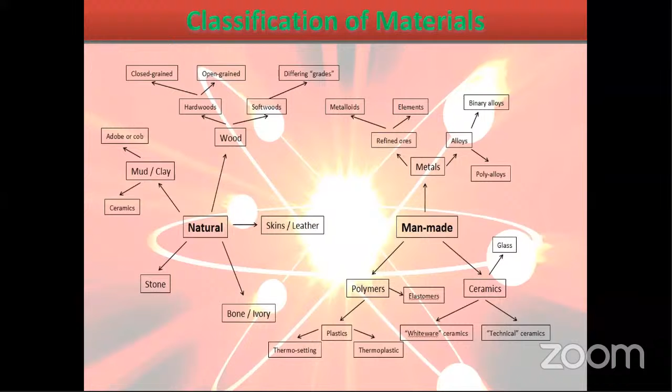Again, polymers are not directly available in nature. We fabricate those polymers like plastics, thermosets, and elastomers, and ceramics, and different types of ceramic materials. So the first classification starts with natural and man-made materials.

Again, engineering materials: in the engineering materials, these are all man-made materials. For example, metals, in which we have ferrous, non-ferrous, and amorphous. Again, there is a sub-classification. The topic is not about engineering materials, so I'm not going deep into it.

Coming to plastics, there are thermoplastics, thermosets, and elastomers — three classifications in the plastics. Thermoplastics have different properties, thermosets have different properties, and elastomers have different properties and structures.

Coming to ceramics, these are high temperature resistant materials. In ceramics, we have different types of ceramic materials. As you see on the screen, there are different types of oxides, nitrides, carbides. There are sub-classifications of ceramics.

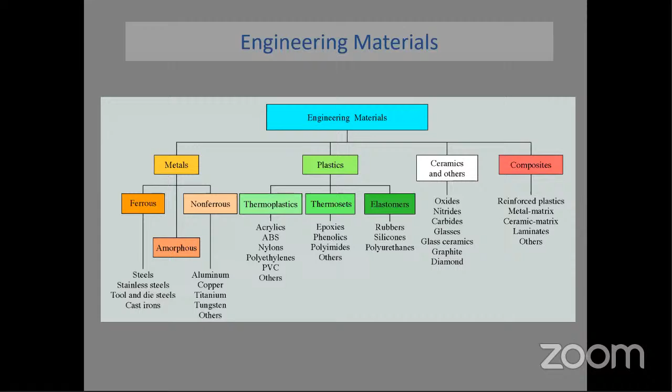Coming to composites: today's topic is about nanocomposites. First we'll see what is a composite and what is a nanocomposite. In composites, we have reinforced plastic composites, metal matrix composites, ceramic matrix composites, and different types of laminates. In the classification, we can name microfiber composites, microfiller composites, nanocomposites, and nanofiller composites. First we'll see straight away the definition of a composite.

Maybe already, from the last two or three days since this program started, many speakers already talked about the composite definition. You might already be familiar with this, and many people are working on this. A composite is a combination of two or more materials. In simple terms, reinforcement plus matrix gives you a composite. In the picture, you can see examples like mud straw bricks, concrete, and glass fiber composites.

The definition for composites and an alloy are the same. If you see, the combination of two or more metals — in an alloy also it's a combination of two or more metals. In both cases the definitions are the same. But in an alloy, when you combine these two materials, the base material loses its original structure and original properties, and the newly formed material has new properties, particularly in an alloy when you combine two or more metals.

But when you come to the composite, even when you combine two or more materials, the basic materials being combined don't lose their original properties. They remain the same, but act as a single material while their own properties remain unchanged. So there is a basic difference between a composite and an alloy.

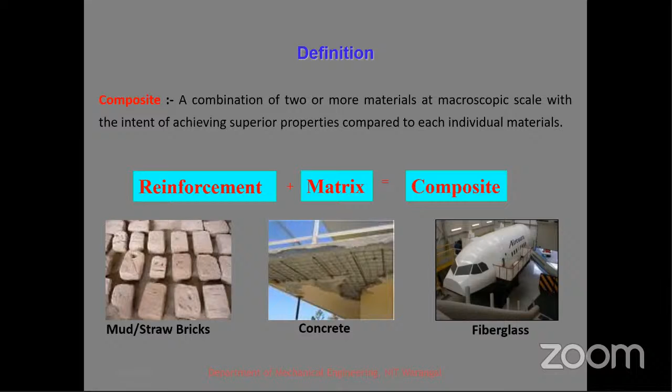Coming to the classification, we have reinforcement and matrix. So what is the use of reinforcement and what is the use of matrix? Basically, matrix is a material which is used to surround the reinforcements.

This matrix material may be metal, polymer or ceramic. It is a continuous phase used to surround the reinforcement. So when it is surrounding the reinforcement, it is not the load carrying material. Matrix is not a load carrying material. As it surrounds the reinforcement, it always transfers the load to the reinforcements.

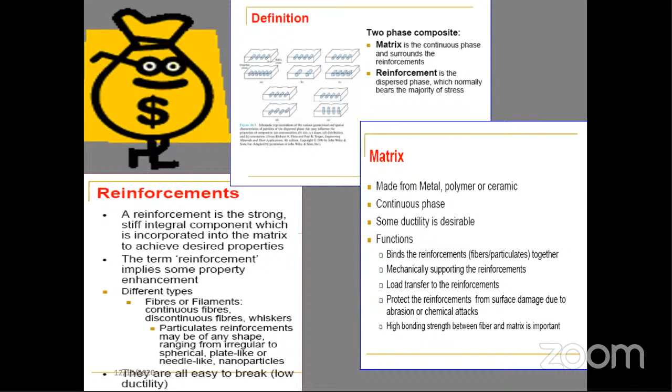The reinforcement is a material which carries the load, whether continuous fibers or discontinuous fibers. When it is particulate, the concept is the same - load carrying material will be the particles, but the majority of load transformation as well as carrying will be taken by the matrix also in that condition, particularly when it is particulates. So the matrix material is a load transferring material, reinforcement is a load carrying material.

Some classification related to matrix: we have metal matrix composites, polymer matrix composites, and ceramic matrix composites. When you are using these three as a matrix material, then we can call that matrix classification - metal matrix, polymer matrix, and ceramic matrix.

Again, in polymers we have thermoplastics and thermosets. In metals we have different types of metals. These metals we will use as continuous fiber sometimes, sometimes use as rod type materials. So when you use metals as rod materials, we call them reinforcements. If you are using metals as a continuous phase, we call that a matrix material.

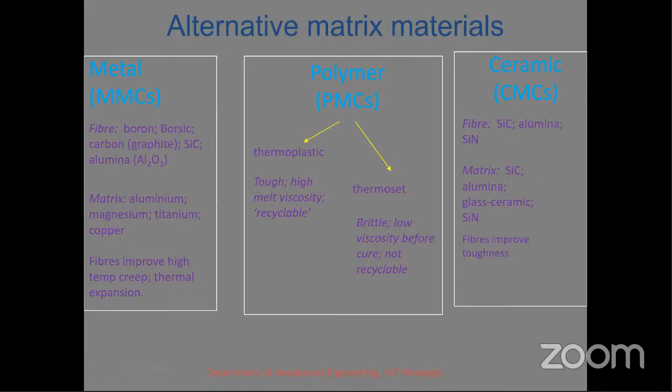So those are general composites. What is a hybrid composite? I'm quickly changing over from normal composites to hybrid composites because the concept is about nano composites. We discuss more about nano composites, so I'm not discussing more about continuous normal composites, continuous fiber composites, all those. Directly I'm going to the hybrid composites.

Normal composites, when you are combining one reinforcement and one matrix, we call normal composites. When you are combining two types of reinforcements with one matrix material, that is called hybridization.

Why do we go for hybridization? Let us take a glass fiber composite and a carbon fiber composite. If I prepare separate individual glass fiber composites and individual carbon fiber composites, and if my application's required strength is in between the carbon fiber and glass fiber strengths - glass fiber strength individually comes to 2000, carbon fiber strength is almost 5000 - so if my application needs something in between, not 2000, not 5000, then if I select carbon fibers, the cost of carbon fibers is higher.

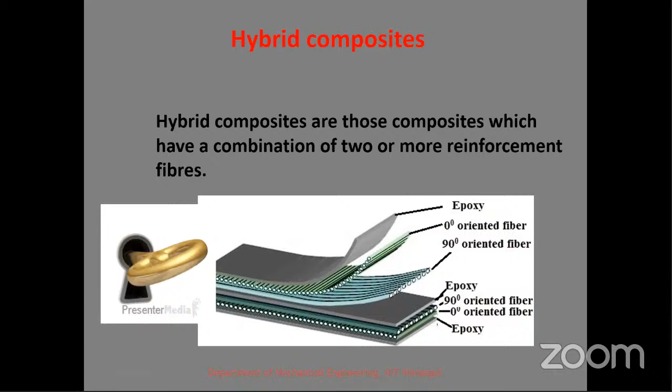So to substitute or increase that property into the composite, I hybridize the material. That is another concept: to substitute some other properties, like once a material has some defects or disadvantages, those disadvantages will be rectified with some other material. So in that case also we go for hybridization. Hybridization means combination, we can go for it. So that is called hybridized composites.

Recently we have slogans like reduce plastic and remove plastic, remove the conventional materials which create pollution. So when we are removing those things, again we need to replace those materials with natural materials. Because if you see the cycle of materials, we started with natural materials. After that, natural materials were replaced with metals. We have metals, and after metals, in the 1940s and 1950s, we have plastic.

So the entire thing is now fully covered with plastics. All the metal materials, 90% will be covered or replaced with plastic materials and composites. Now we have a problem with these composites, with this plastic. Now we are thinking about replacing the plastic with natural materials. Again the cycle, you can see, starts from nature, and again we are going back to nature.

Nowadays people are trying to develop new materials related to nature, biocompatible materials. In that case, the only disadvantage with natural materials is we are habituated to metals, which have high strength. We are habituated to lightweight materials, which is plastics. And now again we are going to natural materials, which have more defects.

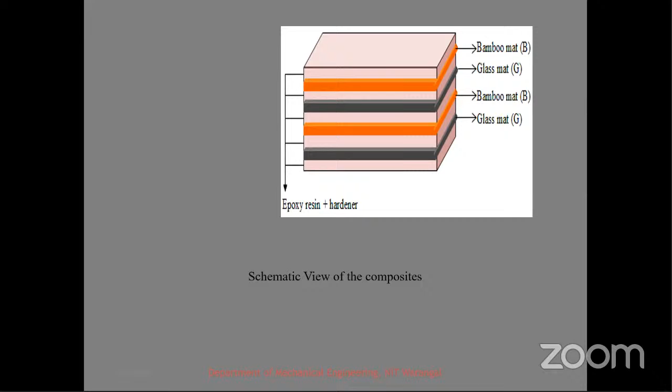So in that condition also, we can go for hybridization. Instead of going for conventional glass fibers, we can try with bamboo material or jute material, natural materials, and we can see the strengths, how much amount of strength is coming to those materials, so that we can compare and replace those glass fibers in present applications. So that is the idea behind this.

So the other concept, after hybridization, nearer to nanotechnology and nanomaterials, is filler composites. Adding fillers to the composites, whether directly adding particles to the matrix, or metals or ceramics as a separate filler composite or hybrid filler composite. So two ways can be done.

These metallic powders can be used directly as fillers into composites, into polymers or metals, or these can be used as fillers in hybrid composites, like continuous fiber composites, to replace the gaps between the continuous fiber composites and to reduce the matrix material. So we can add these type of filler materials.

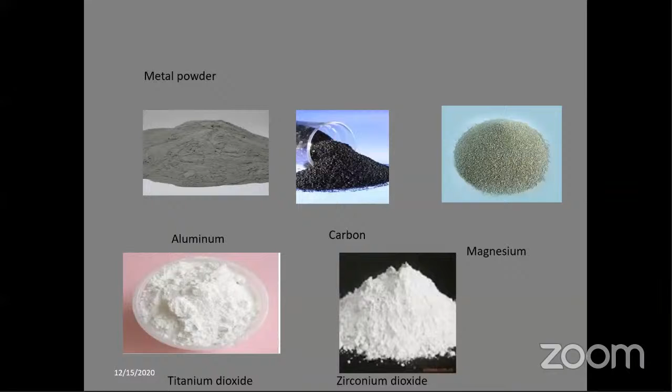In this filler concept, we have two types: one is micro material, another one is nano material. If we use micro as fillers, those composites are micro composites. If we use the same material in a nano level, then we call them nano composites. So now we are going to nano composites. We'll start our topic with this.

If you see 10 to the power of minus 9, that is very small, which we can't see with our eyes. The least material which we can see with our eyes is almost 100 microns, that is our hair, the hair diameter only we can see. That is the least size which we can see with our eyes, 100 microns. Nano means 10 to the power of minus 9, which is much smaller, which we can't see.

Then what is a nano composite? People who don't know the concept of composites and some other terms automatically feel that nano composites means invisible composites. It is nothing like invisible composites. The definition says that in a continuous reinforcement in a matrix, if we use the reinforcement in a nano phase, then we call that a nano composite. So nano composites are visible. The particles which we are using at a nano level, we call that a nano composite.

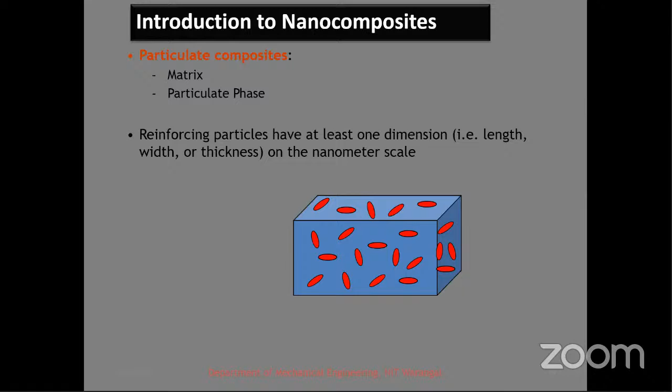Whether it may be fillers or continuous fibers, the fibers may be used with a certain diameter level. We'll see what the different nano levels are in nanotechnology in the next slides. So particularly in a reinforcement, if one phase is in a nano phase, then we call that a nano composite. Now we'll see what nano is.

Simply in mathematical terms, if I say 10 to the power of minus 9, mathematically we can easily understand that. But to see how small it really is, if we start comparing nano to other sizes, we can easily understand how small it is. A small comparison to understand it clearly, a rough comparison, not a planned comparison.

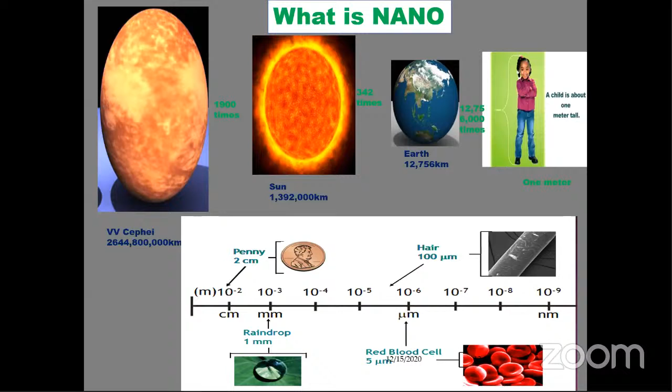And suddenly, like a 1 meter child, discussing the other things becomes difficult. So for a 1 meter child height, again you can see it is 12,756,000 times smaller. Now we'll see in this picture, we are entering into a microzone.

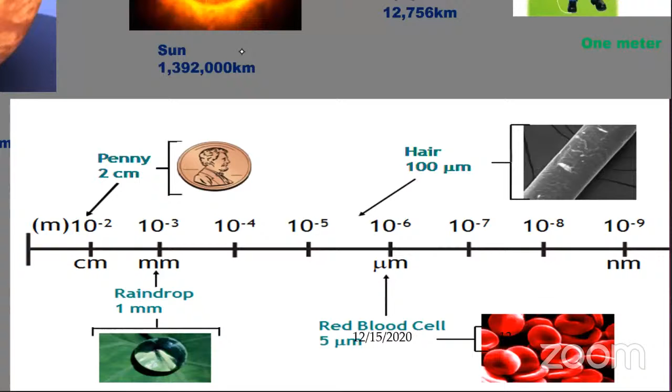In the microzone, you can see a penny coin is 2 centimeters. The raindrop is 1 mm. As I said, the least particle which we can see with our eyes is the hair diameter, not hair length, hair diameter, which is 100 microns. The next one, 5 microns, blood cells. Those blood cells also we can see, but an individual blood cell we can't see, it will be seen as a bulk. So the individual blood cell is 5 microns, which we can't see as an individual, we see it as a bulk material.

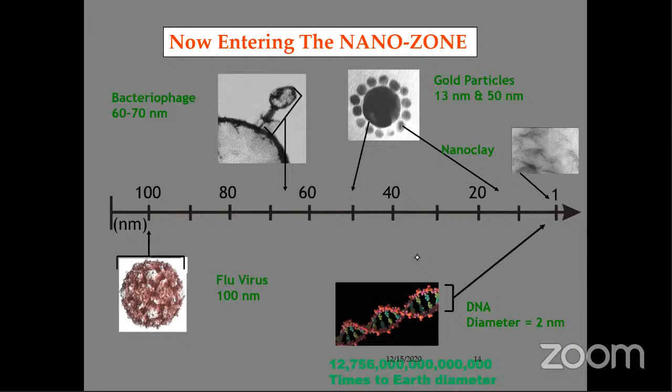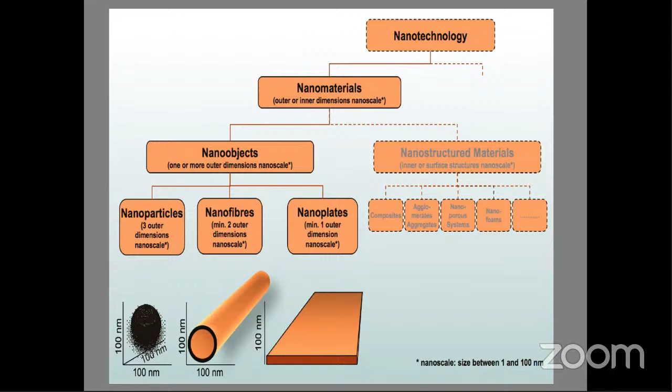This is about nanomaterials, particularly in nanocomposites. We'll have polymer based nanocomposites, which we can prepare. Non-polymer based nanocomposites also we can prepare. If it is non-polymer based, one option is metals, ceramics, ceramic nanocomposites.

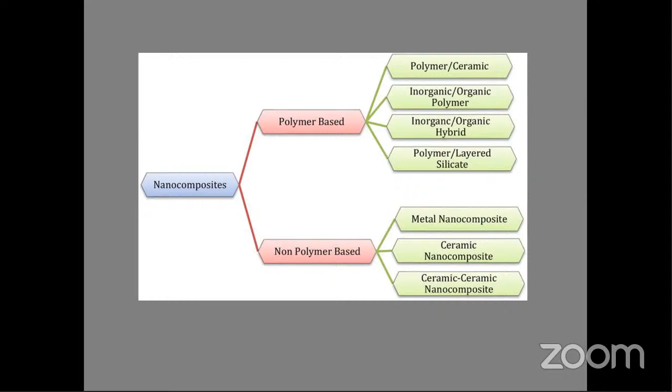So these are different types of materials like polymers—we can use polymers, inorganic hybrids, and polymer layered silicates. By using polymers we can prepare nanocomposites, and by using non-polymer based materials also we can prepare nanocomposites.

So the basic term, when we are preparing nanocomposites—earlier speakers already talked about the preparation of nanocomposites. I'll start with the preparation of nanomaterials: how we prepare nanomaterials, and after that, how we incorporate those into composites.

The first thing is we need to learn how to prepare a nanomaterial. Basically, when you start research, if your objective is to prepare nanomaterials, you'll start developing them. If your objective is instead to prepare nanocomposites, then you don't prepare nanomaterials—you straight away purchase those nanomaterials available in the market, work with them, and fabricate nanocomposites.

Instead of purchasing, if you prepare your own nanomaterials for research, that will be more advantageous, because purchasing a nanomaterial costs higher. If you develop your own nanomaterials, you can vary the designs and develop different types and shapes of nanomaterials.

We'll see some fabrication techniques related to nanomaterials. In the preparation of nanomaterials, we have two methods: one is the bottom up method, another is the top down approach.

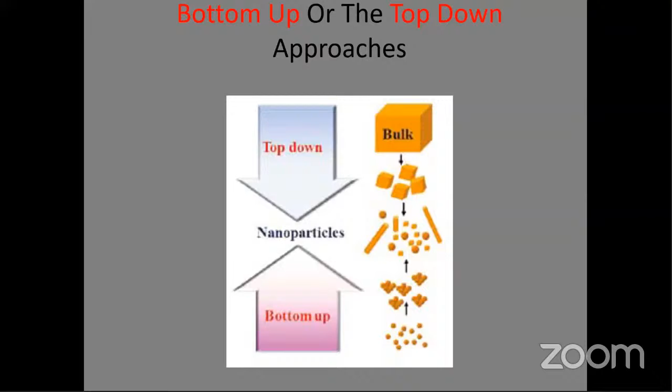We'll see some examples of fabrication of materials. This is a top down approach, like mechanical grinding. Later we'll see in depth how this mechanical grinding works and everything.

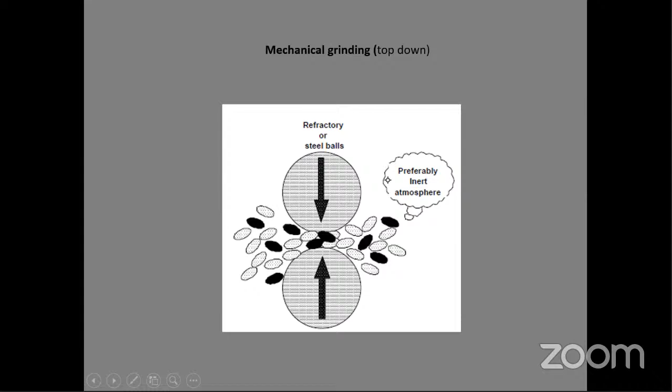Mechanical grinding means two balls will come and contact. When the material comes between these two balls, it automatically breaks into small pieces. So that is about mechanical grinding, which is top down.

The preparation of alumina. First, before going to the preparation, let me introduce what alumina is. Alumina is a ceramic material, not a metal. This alumina is available in gamma phase and alpha phase, two phases.

When you purchase these nanomaterials from outside, the cost is very high. Instead, we can easily fabricate them when we have aluminum nitrate, glycine or citric acid (any one material), some glass beakers, a magnetic hot plate, and a furnace. These are the equipment required to fabricate nano alumina.

The chemicals required are aluminum nitrate, and we can go for glycine or citric acid as a combination. These are available materials; 1 kg of aluminum nitrate costs almost 600 or 700, and citric acid also approximately 500.

After mixing the solution, we keep it on a magnetic hot plate. A magnet is placed inside so that a stirrer placed in the beaker rotates. When you switch it on, the magnet rotates and the stirrer inside starts self-rotating.

We keep this solution on the magnetic hot plate, start the machine, and maintain it at 50 degrees. After 2-3 hours, the water molecules evaporate slowly, since the aluminum nitrate equation shows it has 9H2O, and the other compound also has more water, along with the added water.

Once all the water has evaporated, the remaining material forms as an ash kind of content in the beaker. We take that ash material and put it in the furnace for 8 hours.

The temperature can be varied from 800 to 1000. As I said, alumina is available in two forms: gamma alumina and alpha alumina. If you burn at 500, 600, or 700, the alumina formed will be gamma alumina. From 800 to 1000, you get alpha alumina, which is the pure form of alumina, a pure ceramic.

We need to check by varying parameters like 800 to 1000 in the furnace to find at the least temperature what best alumina we can get when developing it. After that, we get a pure alpha or gamma alumina.

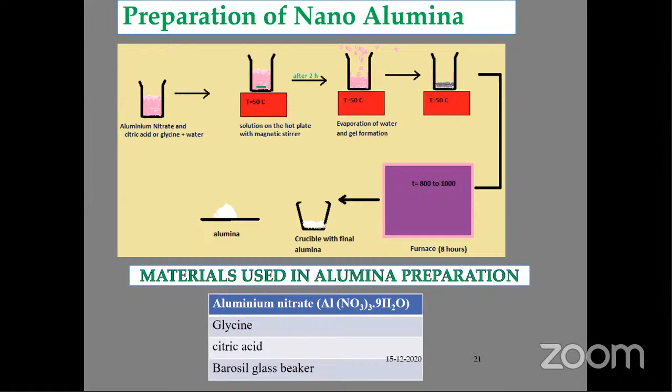So another technique, this is a top-down approach: ball milling. This is a mechanical process, whereas the earlier one was a chemical process. So in preparation, we have two processes: one chemical, and one pure mechanical.

In the mechanical process, in simple terms, if you want to convert something into particles, the best way, like in our houses, is a mixie. We put everything in the mixie and run it for 5 minutes, and the entire solid structure converts into small pieces. The same process is adopted in this ball milling process.

In the mixie we have blades; here in ball milling we have balls, of different sizes. These balls are placed inside the planetary ball mill in beakers, along with whatever material we need to convert into nano size.

We run it planetarily for hours, like 5, 10, or 15 hours, depending on the material's hardness. After running for these hours, due to continuous rupture between the balls and the material, the material converts into small sizes. The bigger micron material converts into nanomaterial. That's what happens in the ball milling process.

Sometimes this process is done without any coolants or liquids, so we can do dry milling instead of wet milling. But sometimes the materials stick to the containers or beakers, and in that condition we go for wet milling.

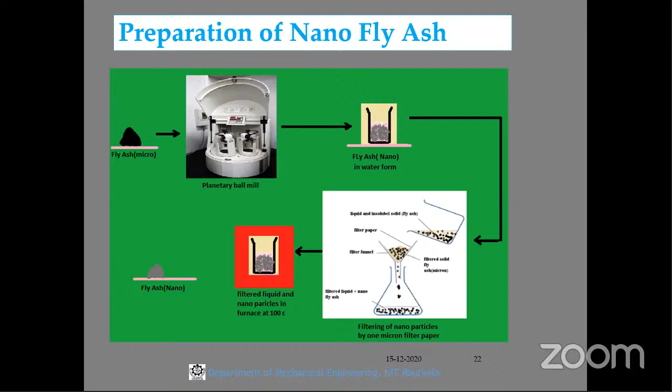So these are the two processes by which you can develop your own nanomaterials based on applications and the materials you select. Next, why do we need to go for these nanomaterials? What are the advantages? Why is nanotechnology popular?

Nowadays we are going towards nanotechnology and trying with nanomaterials and nanocomposites, because we already have continuous fiber composites and micro composites, and now we are trying with nanocomposites. What are the advantages of these nanomaterials? We'll see a few advantages now.

I already explained this slide earlier, the definition of nanocomposites, since we slightly moved to preparation of nanomaterials. Coming back to nanomaterials, I've given this definition again: one dimension will be at the nano level. Let's see what the advantages are. Take this picture — a small cube is taken, and the surface of that cube will be calculated.

The side of the cube is 5 centimeters, so the height is also 5. The area of that cube face is the side of the cube, 5 into 5, that is 25. It has 6 faces, so 5 into 5 into 6, that is 150. The surface area of that particular cube is 150.

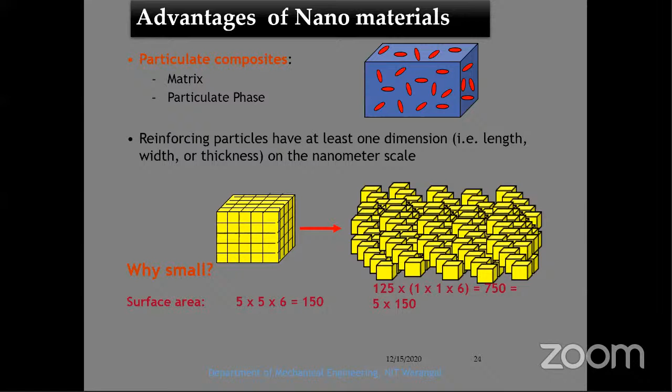In composites, if the interface area is good, the strength will be increased, because the interface area is very important. Basically, when you are developing any type of composite material, we are disturbing the structure of the polymer. For example, if you are developing polymer composites, the atomic structure of the polymers is disturbed by these particles.

When you disturb it, there won't be chemical bonding between the materials, there will be physical bonding. When physical bonding occurs between the matrix material and the micron particle material, the interface is very important. When proper interface takes place with higher interface strength, the load transformation will be better. So the interface is important in composites.

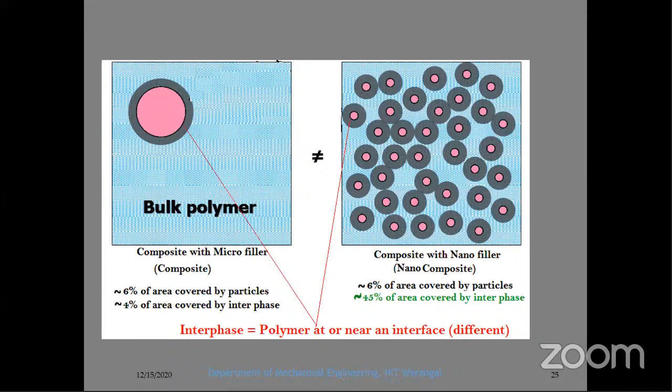So that is another advantage particularly with nanomaterials. These are some of the advantages of nanomaterials. So next is...

There is how to prepare a biocarbon. As I said, these are conventional nanomaterials, like for example alumina preparation, again we prepare it from chemicals.

For example, fly ash is industrial waste. That is one advantage, we are using industrial waste.

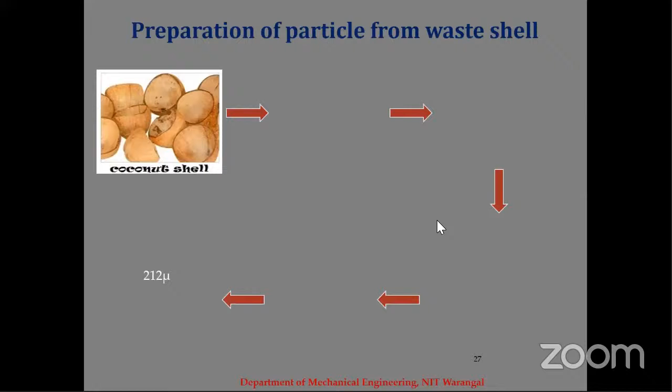Another thing is how to prepare a nano biocarbon. The main importance is, particularly when preparing a biocarbon, how you prepare it, what are the uses, and why we go for biocarbon. Developing biocarbon is important because when preparing these materials, the applications of biocarbon increase, so they can be replaced with conventional carbon materials.

In nature, as I said, there are different materials available, and those materials we can use to show different applications. For example, if I take water filters, if you see the different types of filters, the first filter we have is the carbon filter. That carbon filter's particles are prepared using coconut shells. If you search online, you can see coconut shell materials are used to prepare that charcoal. It's not from coal, it's charcoal, prepared from coconut shell chips.

So particularly when using these natural materials - if you don't use them, coconut shells directly decompose in the atmosphere and release carbon again. Basically, throughout their lifetime, natural plants absorb carbon, then after decomposing, they release the carbon again. So if I use this carbon for different applications, automatically pollution will be reduced, the usage of waste materials increases, and the cost of the final components also reduces.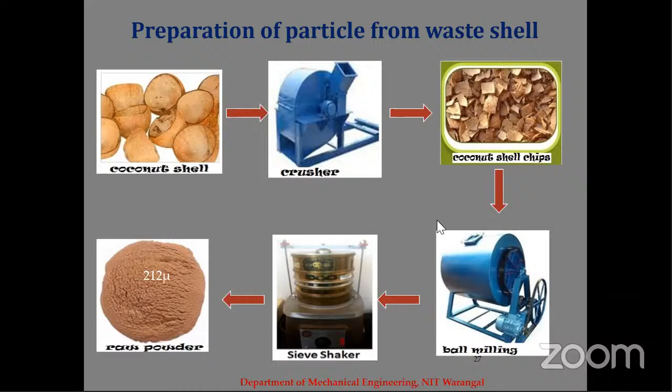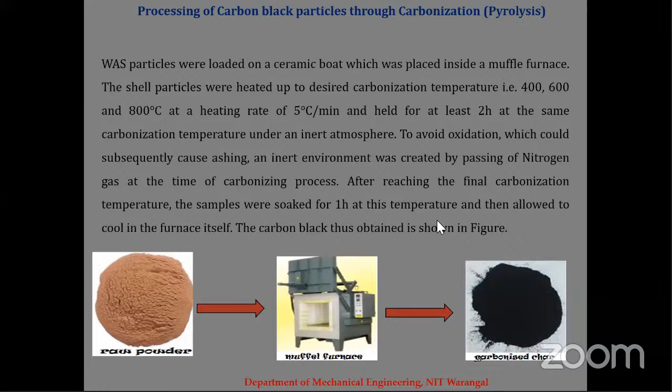So in the example, you can see coconut shells crushed into chips, put in the ball mill, and after that we'll have a raw powder. That raw powder we put in the furnace in an inert atmosphere, and then we have a carbon char, which consists of fixed carbon and allied carbon. I'm not going deep into the pyrolysis process and all that. The carbon particles, when put in an inert atmosphere, automatically become carbon particles - charcoal particles. It depends upon the size, whether you're going for micron particles, bigger sized chips, or nanocarbon. Depending on the sizes, we'll have a carbon char.

That carbon char has two different activation methods: single step and two step. A single step means directly milling it, converting it, and then by physical or chemical activation, burning at different temperatures from 400 to 1000 degrees, and then washing it. The other one, two step, is preparing the carbon in a single step, activating that material, and then burning the material again.

Why we go for activation later is a different concept, because some materials will break bonds at lower temperatures, some bonds won't break at lower temperatures. For example, the carbon formed with different bonds - some bonds will break at 400 degrees centigrade, some bonds won't break at 400 degrees centigrade, so we need a higher temperature. Instead of going to higher temperatures, we go for activation of the materials. That's a different concept in pyrolysis.

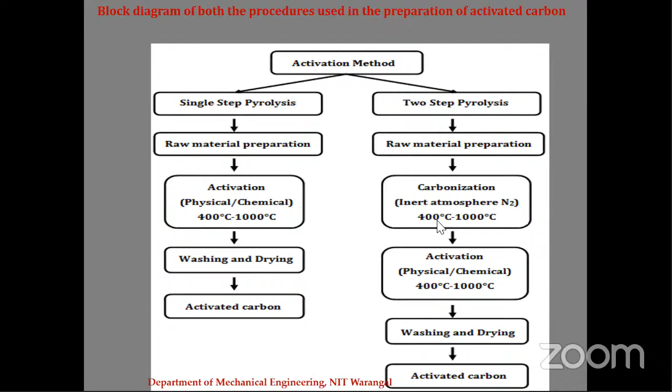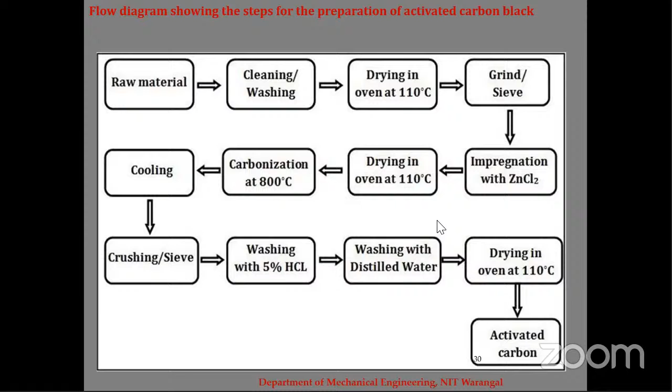So these are the steps involved in the fabrication: raw material cleaning, drying and grinding, activating the materials, drying it again, carbonizing at 800 degrees centigrade, and washing with different materials to remove the activated materials. This is the activation carbon process.

So once you prepare any type of nanomaterial, you need to prove that the fabricated material is in the nano level. So for that, we'll go for SEM analysis or TEM analysis or XRD, some other techniques we'll use to prove that the fabricated materials are in the nanozone.

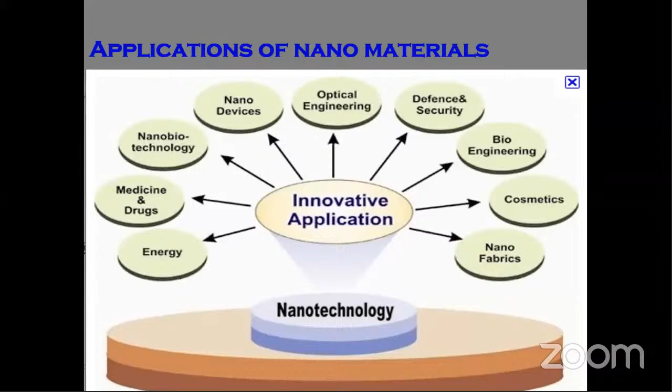Some applications, many speakers already talked about it, like energy applications, medicine, drugs, nanobiotechnology, nano devices, and different nano fabrics, cosmetics - all these are applications of nanomaterials.

So coming to the fabrication of nanocomposites, maybe a few of the speakers may talk about this fabrication. Basically, if I talk about polymers, the basic technique which we have for composites is the hand layup technique. So we can prepare the composites by using a hand layup technique.

In the hand layup technique, we require a mold. We can prepare a mold on our own, and we need to select some polymers which are suitable for the applications. If you are going for nanomaterials, as we are discussing, we'll talk about only nano things. If you select nano fillers, we can select one or two fillers, and we go for certain calculations related to the molds, and some equations related to it, and we design those things.

We'll mix it and pour it into the mold. So this hand layup technique is a traditional, old technique - the first technique, as people know about castings. So the casting technique is the first basic technique.

After casting, due to different disadvantages and problems in castings, further classification of casting came into existence, like low pressure casting, high pressure casting, centrifugal casting, die casting. So many casting techniques came into existence, like investment casting - these came into existence after identifying defects in the castings.

So this is a traditional technique, the hand layup technique - the first basic technique which we have for composites. In this composite technique also, there are different disadvantages. So to remove and reduce those disadvantages, people modified this technique into spray up technique, filament winding, pultrusion technique. There are different techniques for fabricating composites.

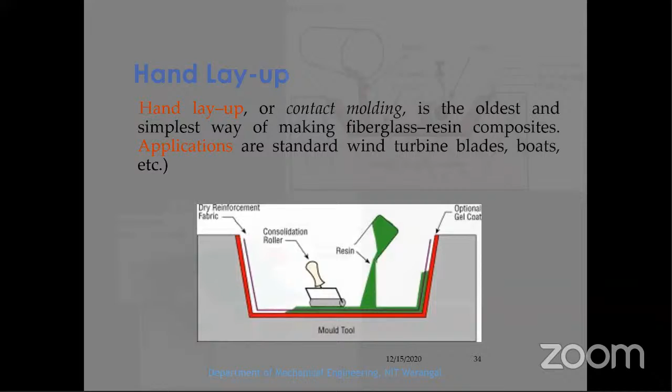So this is the technique. A roller is required and a mold can be prepared. Once we do the calculations for how much volume fraction we need for the reinforcement and matrix, directly we'll mix it and then pour it on that.

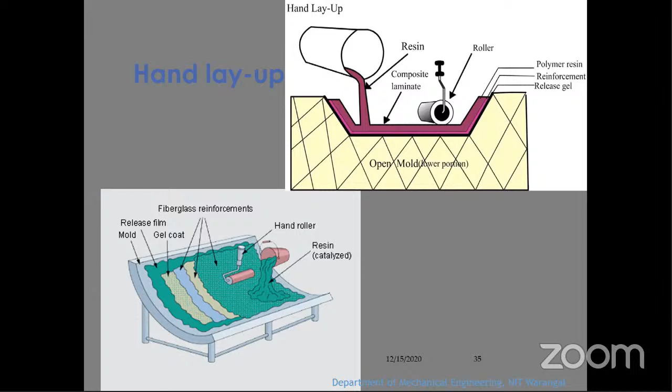A rolling process is applied to make it a uniform structure. Once a uniform structure is formed, then we go for curing it. Once it is cured, then we'll go for a finishing process of those composites, and finally we'll have a composite. So this is the hand layup technique.

To prepare a nano metal matrix composite, we go for stir casting. Stir casting is a basic technique, and again in that also there are modifications - stir casting with mechanical stirring process, and ultrasonication. Ultrasonication also we can do.

So the mixing of materials is important in the stir casting process. When we stir the metals, we need to ensure that nanomaterials won't settle down at one portion or form any agglomerations. Basically, the problems faced when preparing the composites are that particles settle at one portion or form agglomerations in the material, causing the fabricated composite to have certain defects.

To avoid that, we need certain modifications to the process so that we can avoid the settling of nanoparticles or formation of agglomeration of nanoparticles. We need to see that the entire particles must be uniformly distributed in the entire structure. Whatever material we are finally fabricating, the particles must be uniformly distributed in the entire composite. Only then will the composite be formed properly so that the strength increases. So that is about the stir casting process.

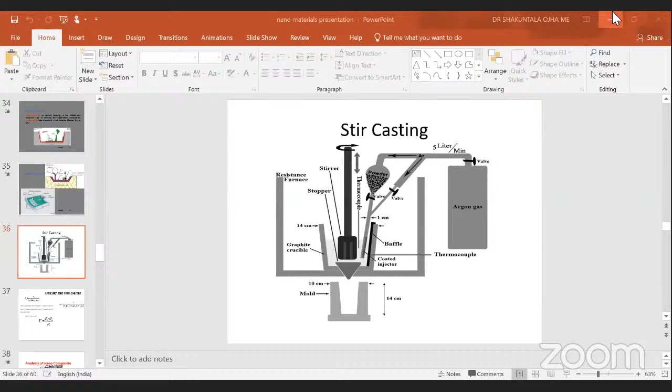So regarding those particular calculations, if nobody requires the calculations, then I'll directly go to density and void content. For the next 20-30 minutes, I'll continue the lecture and then later we'll discuss any questions.

So in composite fabrication, whether nano composites or normal composites, we need to calculate the density. Density is very important, and the next one is void content. So, calculation of density.

Coming to density, we have two terms: bulk density and true density. True density is the real density. Bulk density - when calculating for a particular material in powder form, if you want to calculate the density, you'll get bulk density using the formula mass by volume. That is not a pure density. To know the pure density, we need to use the Archimedes principle.

So using a pycnometer - directly take the material which we need to test the density. These are some formulas, like W naught by W naught plus WA minus WB. The terms written at the bottom are: weight of the sample, bottle plus kerosene, weight of the sample plus bottle plus kerosene plus sample. By using this formula, we'll get the specific gravity of the particular material.

And to know the density, we need to multiply with the kerosene - if you are using the liquid as kerosene, then we go with the density of kerosene; if using water, we can go with water's density. Whatever liquid we are using in that pycnometer. So to know the density of a material, we need to dip that material into the beaker to see how much amount of liquid is expelled.

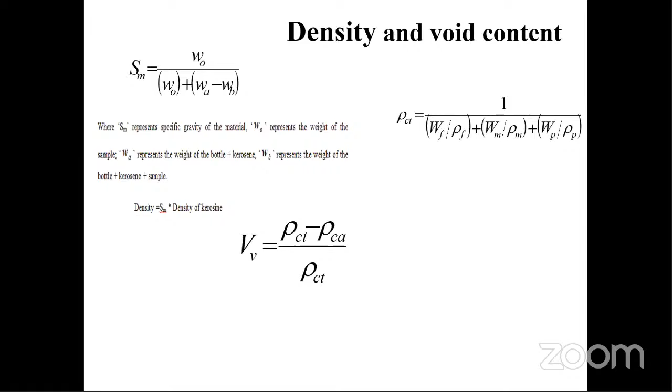Coming to some analysis of nanocomposites: this is a tensile test using a dog bone shaped specimen. Once samples are prepared—whether continuous fiber composites, particulate composites, or nanocomposites—we test them using the tensile test method with a UTM.

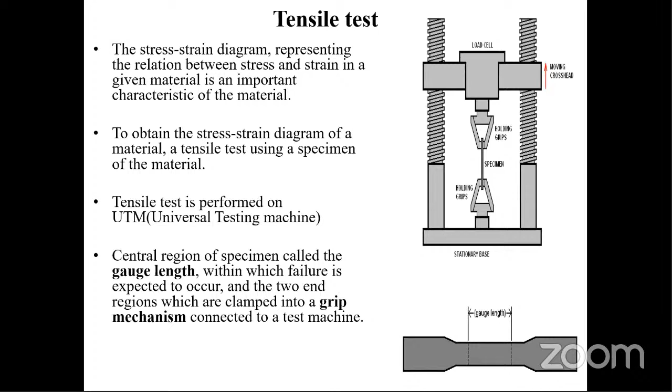A dog bone shape is prepared for testing. If it's a continuous material, we don't use a dog bone shape, but for particles or nanocomposites we do. The maximum load is applied where there is less cross section, so the load acts on the gauge length zone, which is why this region is tapered—bigger diameter on the ends, smaller in the middle. The entire load applies in this zone, and wherever there are surface or internal defects, the load affects that area most. If there are no defects, failure occurs at the center.

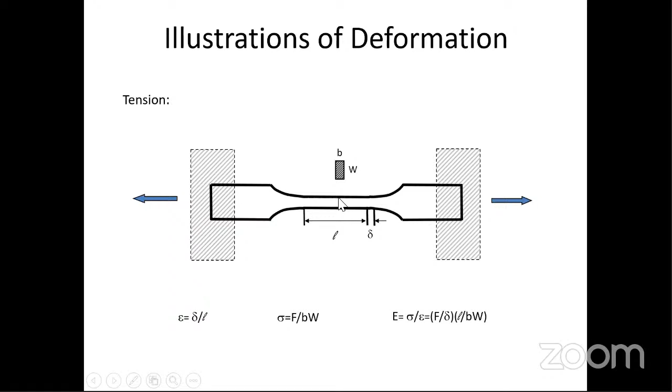Next is the compression test, applied on the same UTM but with load in the opposite direction. For fibers, buckling takes place; for particles, breakage occurs depending on whether the material is ductile or brittle. If ductile, elongation occurs and the length converts into width. If brittle, a sudden fracture takes place and the material breaks. This happens during compression.

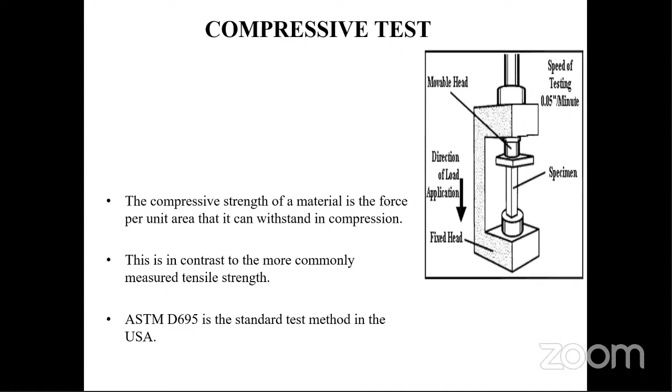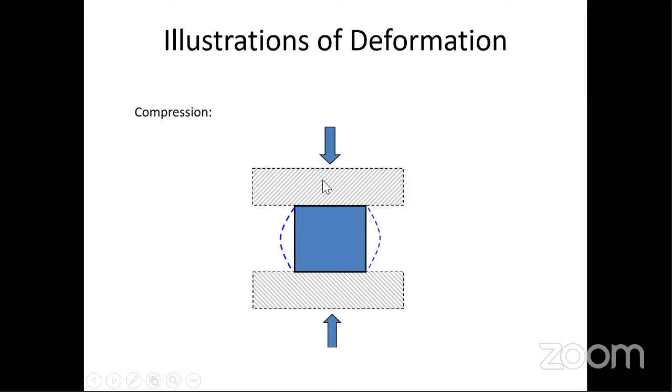You can see this directly in the picture: when compressing, the length decreases while the width increases.

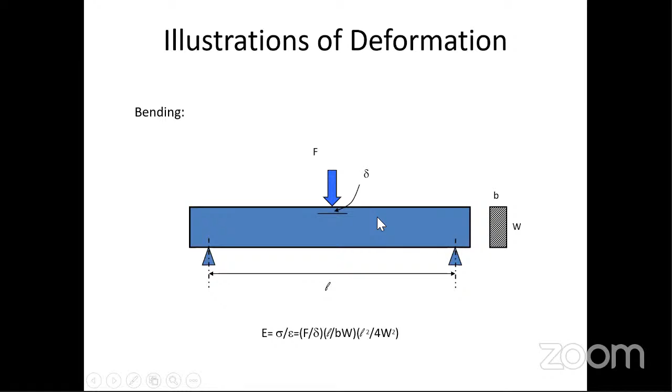Another test is the bending test. Whatever the sample—nanocomposite or normal—we go for a 3-point bending test, with two supports and load applied at the center, causing bending. When the supports are placed farther apart, shearing is less and can be assumed negligible, so maximum bending takes place. There will be a bending load, and the shearing component of the load will be minimal.

So the same thing, interlaminar shear stress, the same type of 3-point bending test, but the length is much less, half of the earlier one. In that condition, shearing of the layers will take place and bending of the fibers will be negligible. So when bending is negligible, we'll have a shearing load, that's why the interlaminar shear test is done. The shearing of the fibers can be seen here along with the particles.

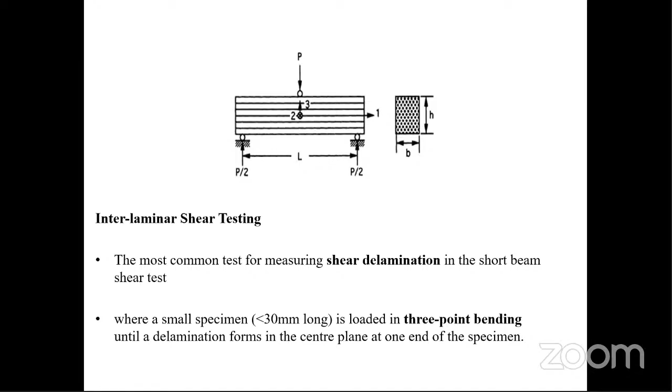So these are some characterizations related to nanocomposites or general composites. Once you develop any type of composite and test all the mechanical properties, sometimes we'll have a disadvantage - we don't get the exact required results. Then automatically we go for a change of materials. Instead of changing materials, if you test other properties, like tribological properties instead of mechanical properties, they may enhance. So when we have better tribological properties, instead of showing mechanical applications, you can show that composites are materials in terms of tribological point of view.

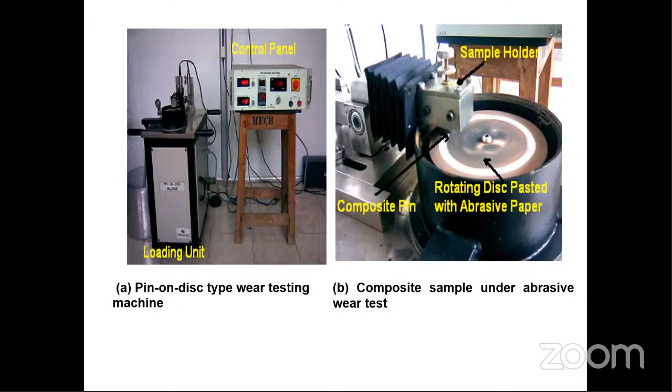So this is a pin on disk apparatus, used for an abrasion test. In the picture you can see it - the pin will be whatever composite or nanocomposite we develop, placed here, and the disk on top will be rotated. So the composite or nanocomposite pin, how the wear resistance takes place due to addition of these nanoparticles, that will be tested and compared.

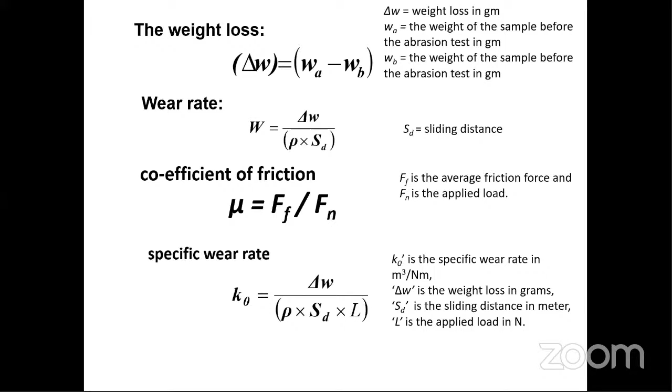Some values related to it - this will be conducted by the weight loss method. The initial weight of the composite and final weight of the composite will be taken, and then we calculate using the weight loss method, and a wear rate will be calculated. These are the terms and calculations when conducting a wear test, abrasive wear test. So when two materials are in contact, due to wear, how material loss occurs will be calculated. If mechanical properties are less, then we check for tribological properties.

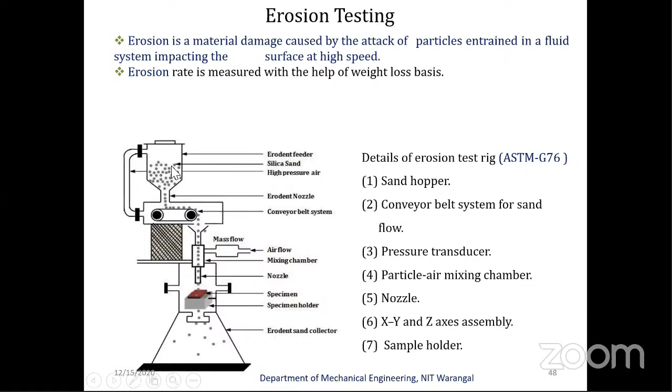Another test is the erosion test - this is a sand impact test, another characterization. When sand impacts on top of a material, here in the picture you can see it, on the composite, due to impact, material loss occurs on the top surface at different angles. We can vary these angles in this apparatus from 30 to 90 degrees, and see how the material behaves with different angles of impact. So when we fabricate a nanocomposite, we can see due to impact how the material behaves at different velocities as well as different angles.

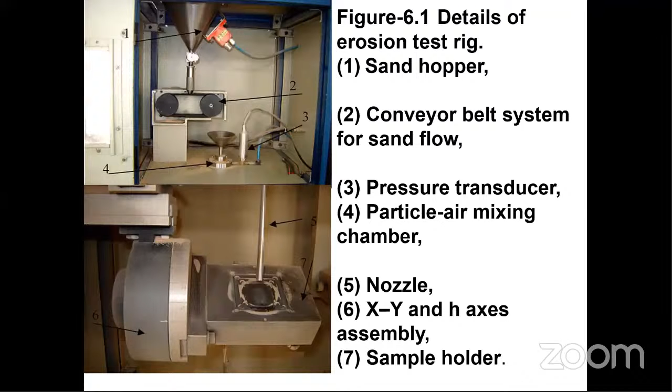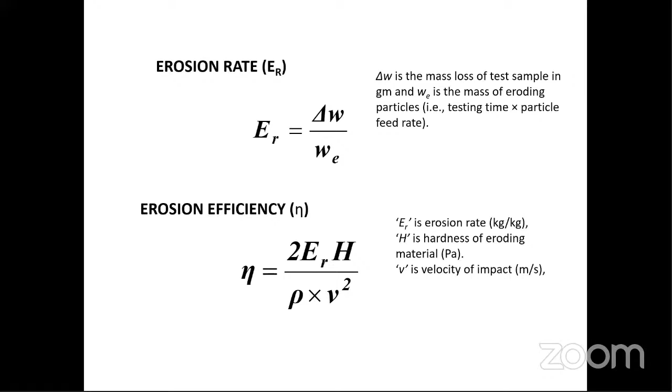This test is also calculated by the weight loss method. Initial weight and final weight of the materials will be calculated and tested. The formula is delta W by WE, that is the total mass of the erodent particles and the weight loss.

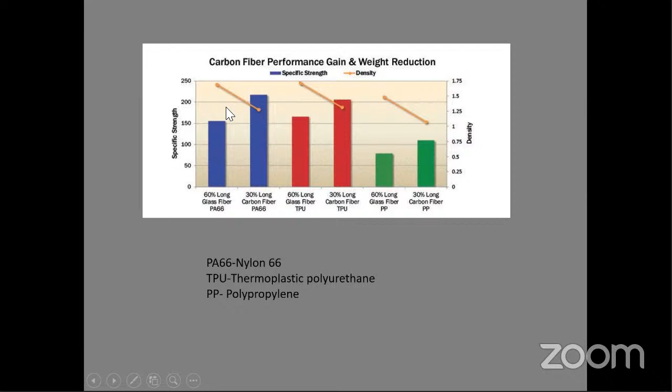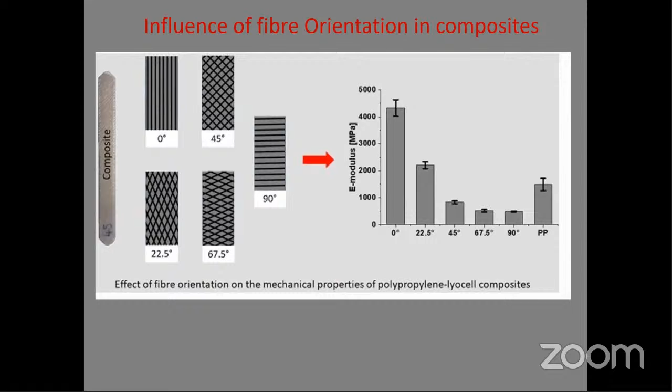Even for continuous fibers, the orientation of the fibers is important, depending on which direction we are applying the load. If you have fibers in that direction, the strength of the composite is higher. If you don't have fibers in that direction, the strength is less compared to the pure polymer.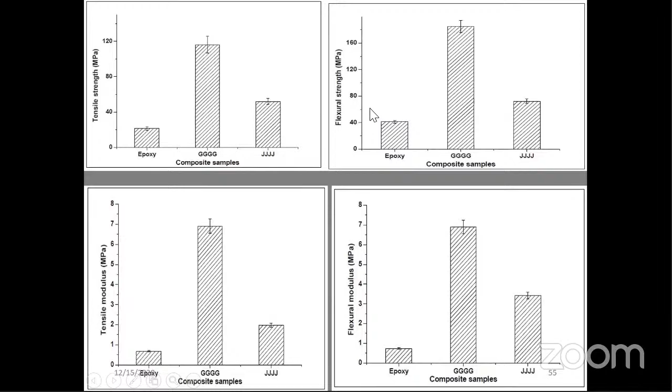This is compared across flexural strength, flexural modulus, and tensile modulus. All the results show the same trend.

So instead of going for plain composites, the next concept is hybrid composites - adding a hybrid composite. Instead of plain jute material, we combine glass and jute, but still none of these materials have the capacity to replace the continuous 4-layer glass fiber composites. In all the results, the glass fiber composites show better results.

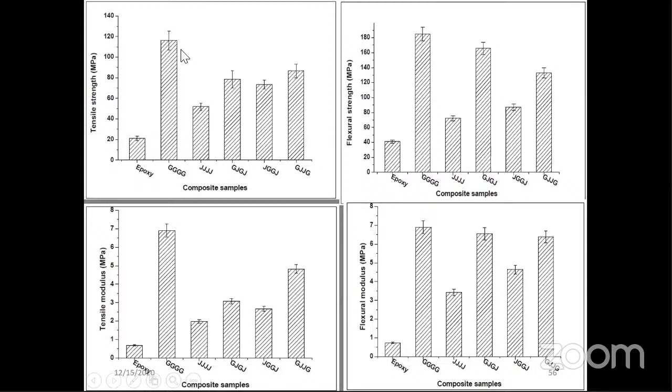So the next technique is using micro particles along with hybrid composites. Along with hybrid composites, we added some nano fillers and micro fillers to see whether there's a chance of increasing the strength or not. Still, none of the materials are capable of replacing the conventional glass fibers directly.

So we went for nanotechnology again. In the nanotechnology study of flexural strength, some materials with 4% nano fillers, with glass as outer layers and glass as a middle layer, gave better results compared to the pure 4-glass composites. So glass as outer layers or alternate layers with 4% nano fillers gives the best results compared to pure glass fiber composites.

So instead of pure glass fiber composites, 2 jute fibers plus 4% nano fillers can replace those materials. These 4% nano fillers are materials that are generally available - fabricated nanomaterials - and the jute materials are natural materials. So these conventional glass materials can be replaced by these alternatives.

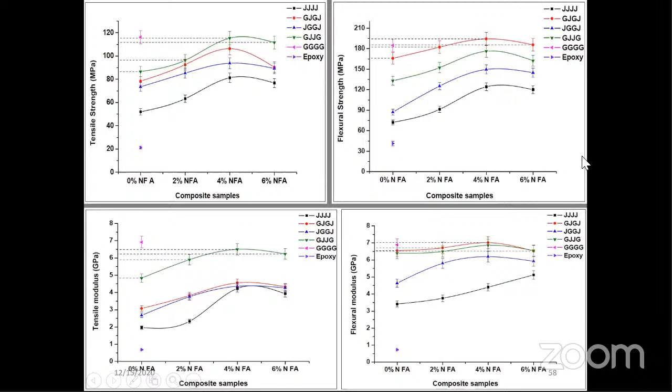Finally, I'll conclude here with this. If you have any questions, I'll try to answer. A few questions were already in the chat box, and I answered them. If anybody has a question, write in the chat box so I can answer it.